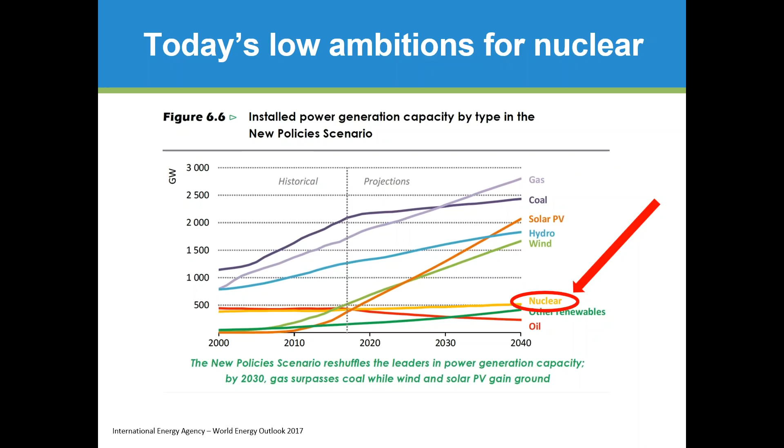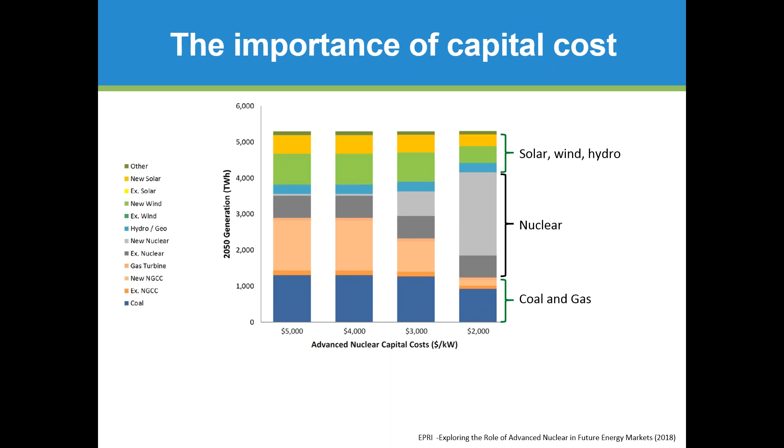The reason underpinning this is fairly obvious. This is a chart from another study, from EPRI, the Electric Power Research Institute in the USA. It's a 2018 report, and they did a very nice piece of work using quite sophisticated modeling tools to look at what impact the capital cost of nuclear had on its projected market share, in this case market share by 2050. This is US market specific, but it's a pretty good indicator for the global position as well. What it's saying is that at $5,000 per kilowatt, the bar on the left, nuclear basically has no role to play. At 4,000, it still has no role to play. At 3,000, it starts to become an economically viable option. And at 2,000, it becomes the dominant power source, even in a country with very cheap fracked natural gas.

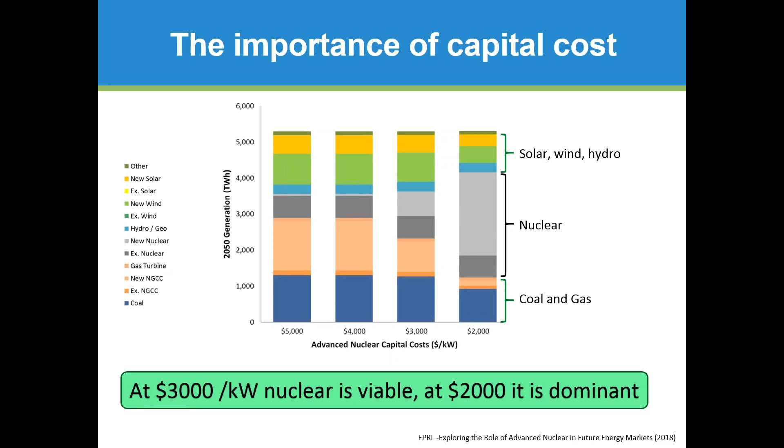It's literally all about capital cost with nuclear. And of course, where we are today is on the wrong side of that $5,000 figure, which is why nuclear is essentially going nowhere.

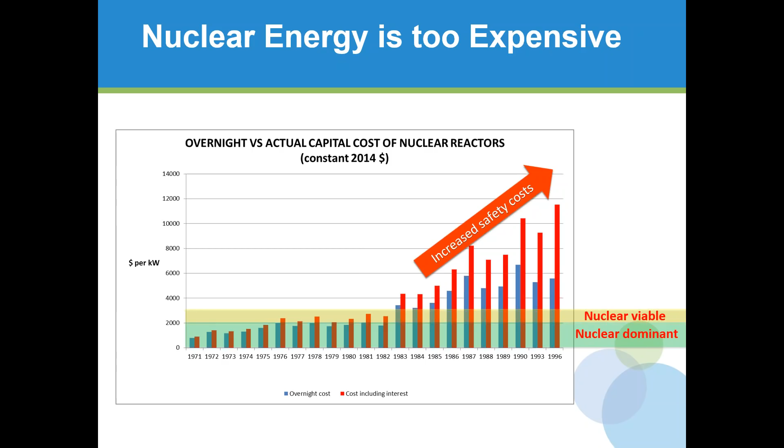What happened in 1980? You probably all know the dates. We're talking Three Mile Island and Chernobyl. After that point, a technology which prior to that point was actually cheap enough to become a really important economic force in power generation ceased being so. Prior to 1980, countries could go, like France, almost entirely nuclear and do so at great profit. Since 1980, that has no longer been the case. So the solution is pretty obvious: fix that problem of increased safety costs, but nobody is going to simply take away the safety systems. That would not be a good move.

I find it quite helpful to look at a really standard graph from the Health and Safety Executive. You have equivalents from most safety organizations around the world. It's called a hierarchy of controls, which are used to reduce risk.

It goes from the top, which is blue, the most effective controls you can apply to risk, and ends at the bottom with the least effective: start eliminating, then substituting, then bringing engineering controls, then administrative controls and personal protective equipment.

So what happened after Chernobyl, Three Mile Island and Fukushima? Essentially, we put a great many engineering, administrative, and to a degree personal protective equipment controls in place. In the context of nuclear major risks, PPE are iodine tablets, and right now they're suggesting distributing those to the entire population of Belgium. That's going to do nuclear a great deal of good, obviously.

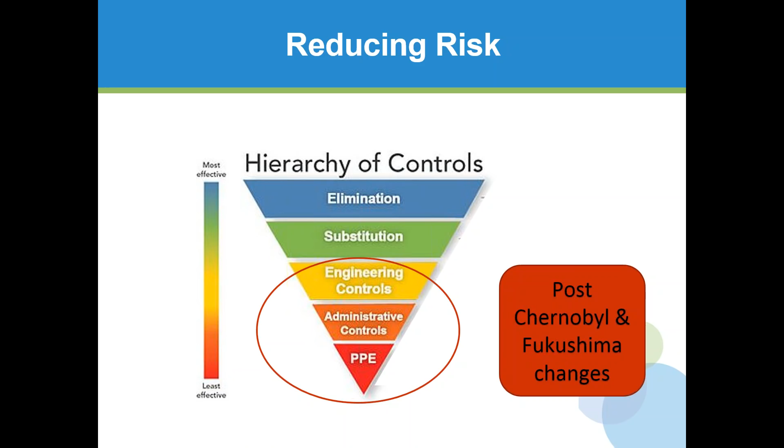We have administrative controls of extraordinary depth and power, and we spend a huge amount of money on engineering controls with containment domes, ultra-reliable systems and so on. What we haven't really done is the things at the top of that pyramid, which are elimination and substitution of hazards. And that is the Moltex approach to this.

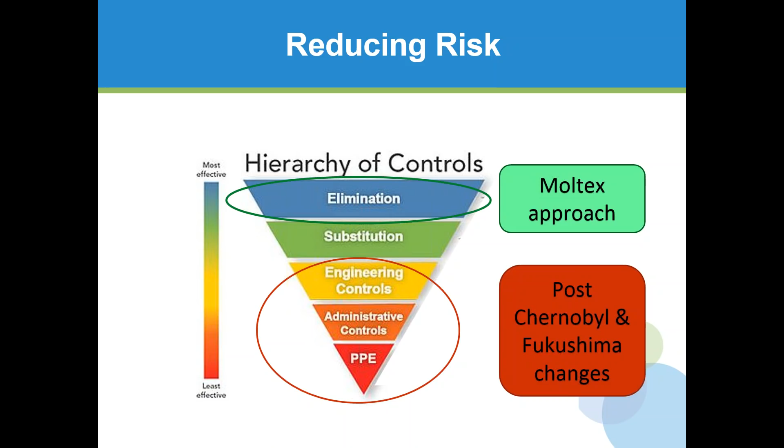It is to focus on reducing risk by eliminating hazards. And there's a very good story that can be told. So let's talk about hazards.

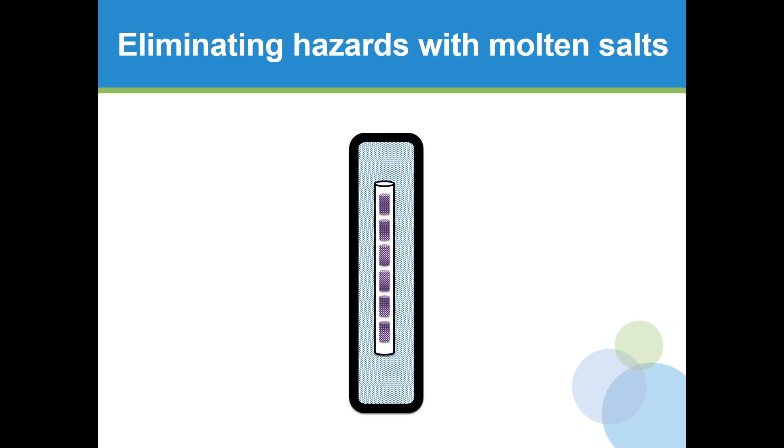This is my diagram of a pressurized water reactor. I have a big black heavy metal pressure dome, pressure containment. Inside that you have water. Inside that you have a fuel tube, or rather a few fuel tubes, containing uranium oxide pellets. So where are the hazards?

Well, they start actually with the fuel. Fission, as you all know, produces gaseous fission products, and a lot of them — a typical fuel pellet by the end of its life will have produced about 50 times its own volume of gas. Mostly noble gases, but also cesium and iodine, which in the chemistry of fuel pellets are also gaseous.

Those gases are trapped in the pellets. The amount of space for them is quite limited because uranium oxide fuel pellets are very dense, around about 5% available space. So you're squeezing 50 volumes of gas into 5% available space. You are talking about hundreds, approaching 1,000 bar pressure of those contained gases. That's huge. It's a tribute to how well we make uranium oxide fuel pellets that they actually hold those pressures in.

Second risk, of course, is that we've surrounded these fuel tubes with water at over 300 degrees centigrade. Well, you don't have to be a genius to know what happens if that pressure boundary fails. Boiler explosions have been some of the worst industrial explosions in history, and fundamentally, Chernobyl was a steam explosion. So you've got at the heart of your technology two really major hazards: volatile, highly pressurized, radioactive fission products, surrounded by a very powerful driving force to aid their dispersal.

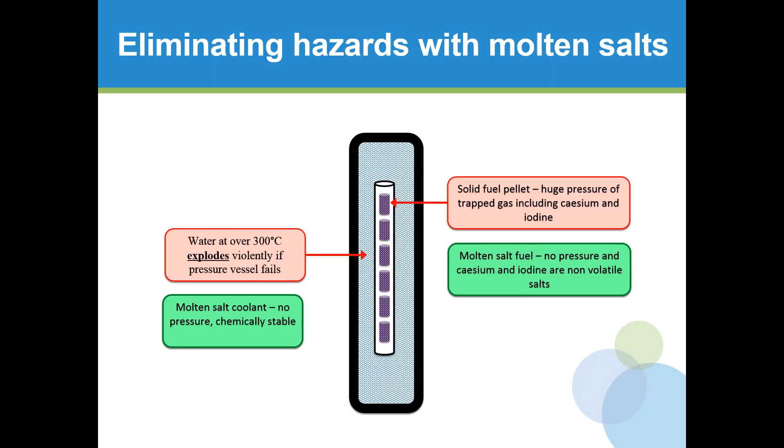Okay, enough economics for the moment. Let me talk about reactor design. I'm going to do this quite quickly because this is only a 30-minute webinar.

First of all, I need to explain that there are two completely different forms of molten salt reactor out there in the world. The Stable Salt Reactor, which is the Moltex technology, has separate molten salts for the fuel and the coolant.

All of the MSRs are based on what was developed in the 1960s in the USA, which is a system where the fuel and the coolant are the same thing. When you have fuel and coolant the same, you pump the fuel into a reaction chamber where it goes critical, gets hot. You then pump it through a heat exchanger where the heat is taken away to do something useful. And then you return it through chemical purification systems, pass valves, drain tanks, all sorts of complications. But essentially, it works by pumping the fuel salt in such a way that it flows in turbulent form, which gives you efficient heat transfer. The Moltex approach, the Stable Salt Reactor, does not do that.

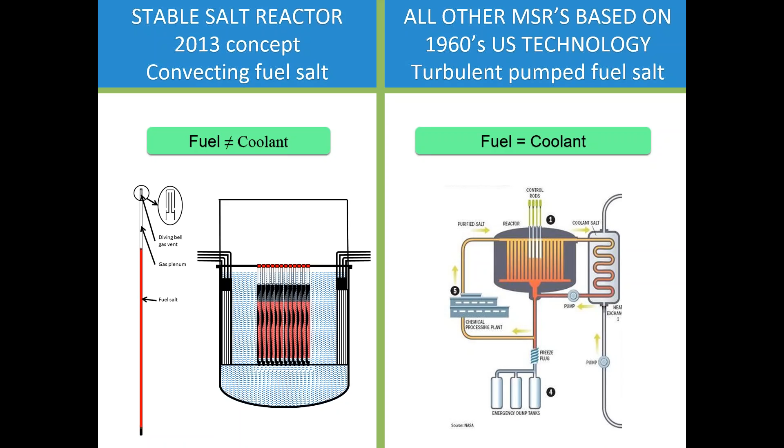It puts molten salt into fuel tubes, grouped into fuel assemblies, really very, very like normal solid-fueled reactors. That brings some really major advantages.

I've just listed here some of the challenges associated with pumped molten salts. You're pumping something which is radioactive in the sense that we have never really experienced before. This isn't the glowing blue spent fuel coming out of a PWR. This is actually the fuel in the core. This is emitting gamma radiation at several kilowatts per litre. It is radioactive in a way that is almost hard to comprehend, and we're pumping it around a circuit, which someday is going to spring a leak.

The engineering challenges are obvious. Quickly, the other ones: because of the necessary chemistry to pump molten salts, you require new alloys, requiring new in-reactor validation to make them usable in a modern nuclear system. People talk about Hastelloy-N as being something which has experience. Well, Hastelloy-N hasn't been used in nuclear since the 60s, and the data produced then for its behavior would not be accepted by modern regulators. So you are looking at a new alloy.

The third is incompatibility with the IAEA safeguards protocols. The agency's safeguards protocols essentially work by tracking fissile material in defined fuel assemblies. Pump systems don't have defined fuel assemblies. They have bulk fissile material where you have to know the composition and the volume precisely at all times. It can be done, but right now the protocols don't exist, and it will probably take over a decade to put them in place. Last one there, just skip over the off gas.

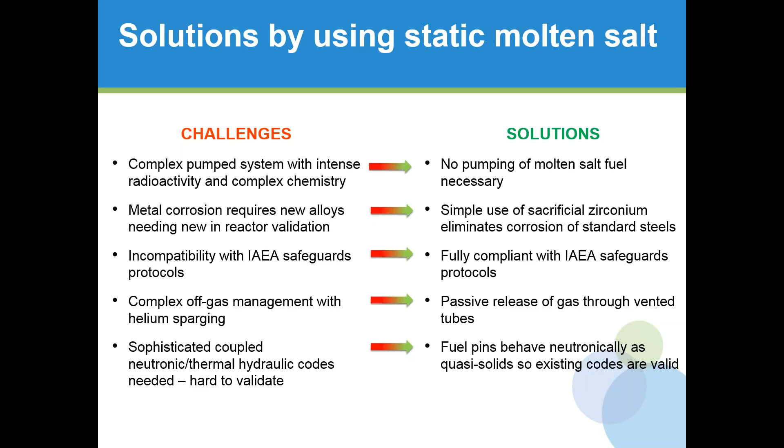So if it's such a good idea to use static salts, why haven't people done it? Why is this a new concept? Because it's actually pretty obvious. And the answer comes back to a mistake. Only way to put it, really.

The first molten salt reactor was developed for the US Air Force. They wanted a reactor to power an aeroplane, and they quite rightly rejected the concept of putting molten salt into fuel pins. They did consider it, and they modeled it. They rejected it because in an aircraft you can't rely on gravity. And if you can't rely on gravity, you can't rely on convection. And in liquids, the dominant heat transfer mechanism is by convection. And so they rejected the idea of unpumped molten salts for really very good reasons. In an aircraft, they were a disastrous idea.

But then nobody went back and revisited that decision when we decided not to fly nuclear reactors around the world in aeroplanes. And we should have done. That is essentially where Moltex started. We revisited that decision and showed that actually static molten salts work just fine, provided you can rely on convection.

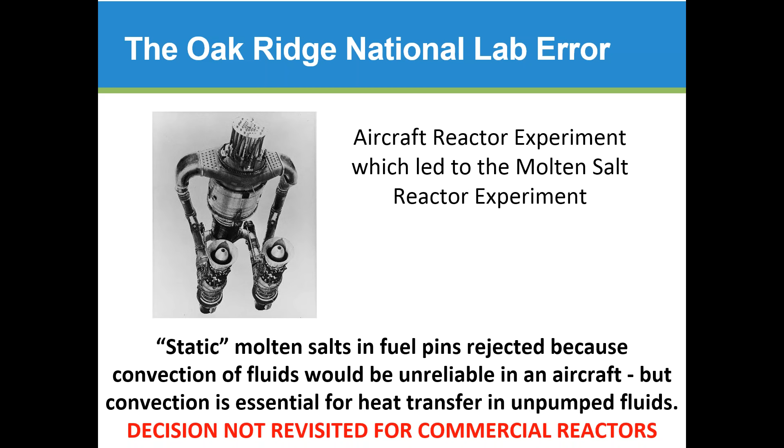So what's the reactor which results from that? This is the very oversimplified cartoon version, but it's useful just to give you an orientation of where we are.

So we have a tank with an argon gas containment above it. In the tank we have a pool of primary coolant, which is a zirconium fluoride-based molten salt. Immersed in that pool we have the fuel assemblies forming the reactor core. The fuel is a mixture of sodium chloride, plutonium and uranium trichloride that I will talk more about later. Also in the pool are the primary heat exchangers and pumps, which circulate the coolant through the core.

This is an integral design. It allows all of the radioactive coolant to be held within the pool rather than pumping it outside of that containment and then having to worry about leaks.

For those familiar with nuclear reactor design, this will look quite similar to a sodium fast reactor, and it is, apart from the absence of sodium and the use of molten salt fuel, except for one quite important difference, which is that the apparatus to move the fuel assemblies, the fuel assembly support and movement mechanisms, are above the level of the coolant salt. Now this is actually hugely helpful because you are not having to do mechanical things inside the molten salt, which simplifies the engineering quite a lot and also means you can see what you're doing.

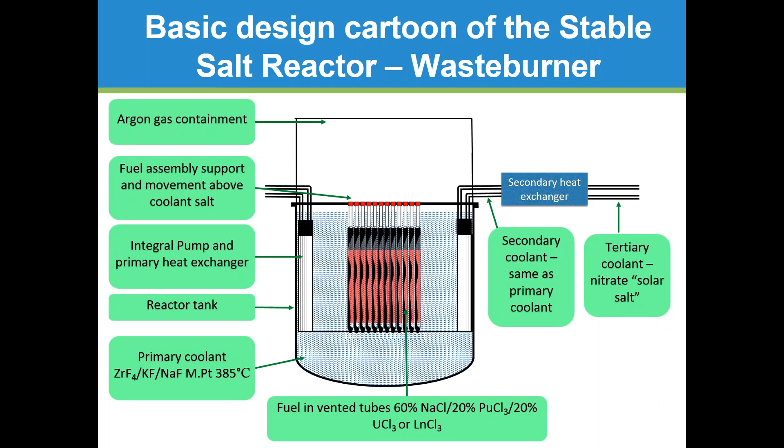Okay, so just going through the reactor step by step. We start with the fuel tube. The fuel tube is made of the same steels we make sodium fast reactor fuel assemblies from, probably HT9 in our case. It has a gas plenum to collect the fission gases and hold them up long enough for the particular xenon-137 to decay to cesium-137 so it doesn't escape the tube in that way. At the top of the tube there is a gas vent, which is a non-return valve, so that the excess gases can bubble into the coolant.

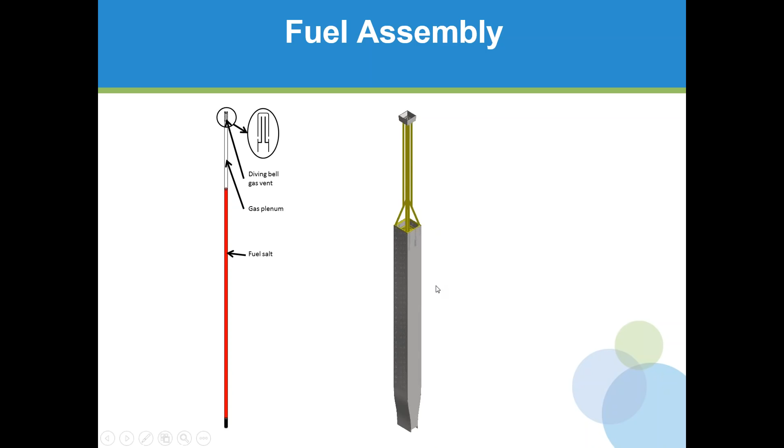Those fuel tubes are put together into a fuel assembly with a wrapper made again of the same materials used in sodium fast reactors.

Those fuel assemblies are put together into the basic reactor module. This is a modular reactor, but not modular in the context of conventional small modular reactors. I'll come back to that. This is a factory-produced 150 megawatt electric module. It basically contains all of the engineering equipment for the reactor in the module. It contains heat exchangers, the pumps, the apparatus for moving the fuel assemblies themselves, and quite a few other things. All the instrumentation, contains the control blades, all of that in the assembly.

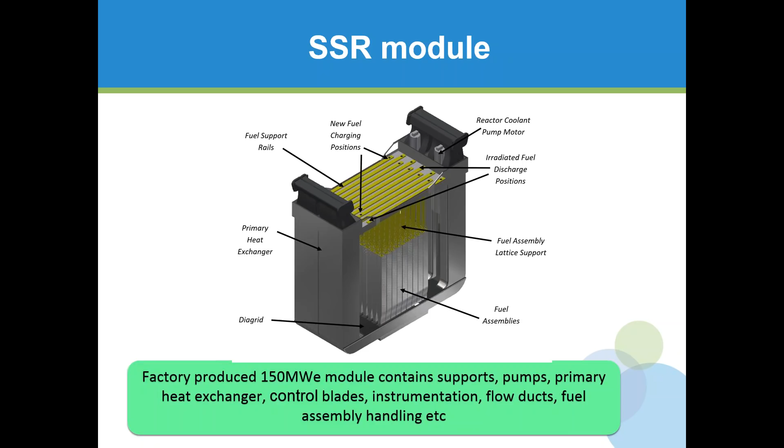That assembly sits in a tank along with other assemblies. In this case, this is our smallest version of the reactor. It has one full assembly in the middle and two half assemblies at the outside. Between the modules, rather not the assemblies, between the modules are control blades which are used only to shut the reactor down. They are not control mechanisms in the sense of adjusting reactivity. They're either in or they're out. If they're in, the reactor is shut down. If they're out, the reactor is live.

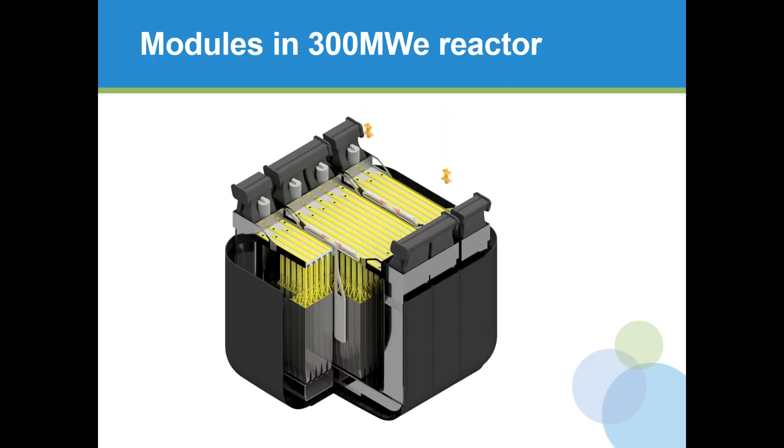There is a problem with what I would call conventional small modular reactors, where if you want a decent sized power station, you need to put half a dozen reactors onto the same site. You gain the advantage of modular factory construction with such reactors, but you lose the economy of scale, and economies of scale are very real. With the design of the Stable Salt Reactor, we achieve the benefits of modular factory construction, building basically the entire nuclear engineering part of the reactor in the factory, but we maintain the economy of scale of having a single reactor, single control room, single fuel managing system. Economically, that's actually quite important.

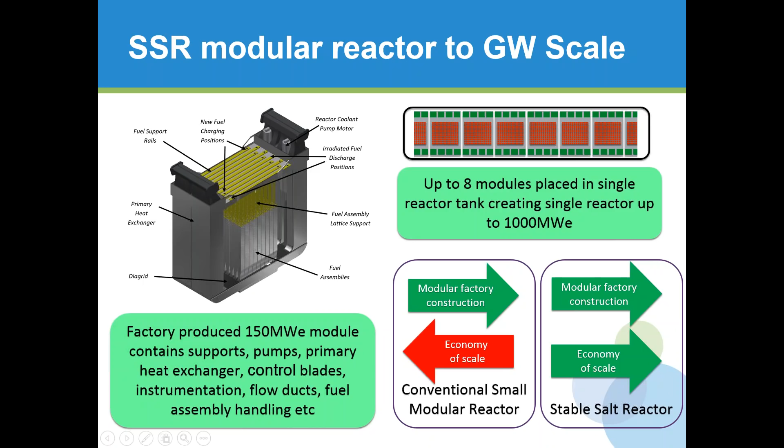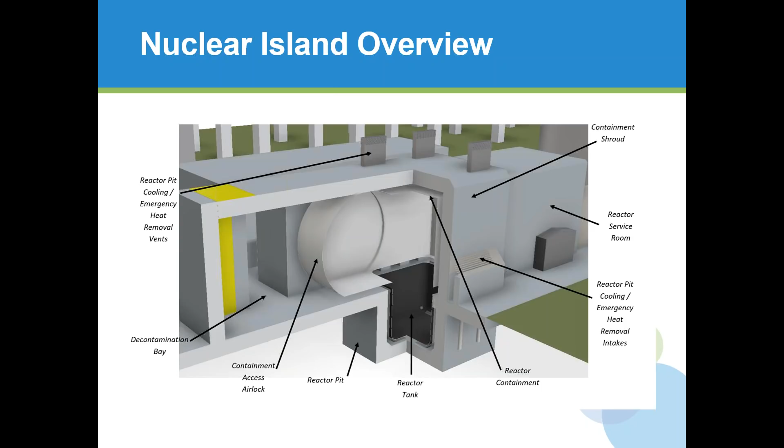I have a best part of an hour talk on the design of this, which I don't have time to give here, so I'm just going to go very quickly through some of the key design decisions and why we made these. There's a lot more information on this available on our website for those interested.

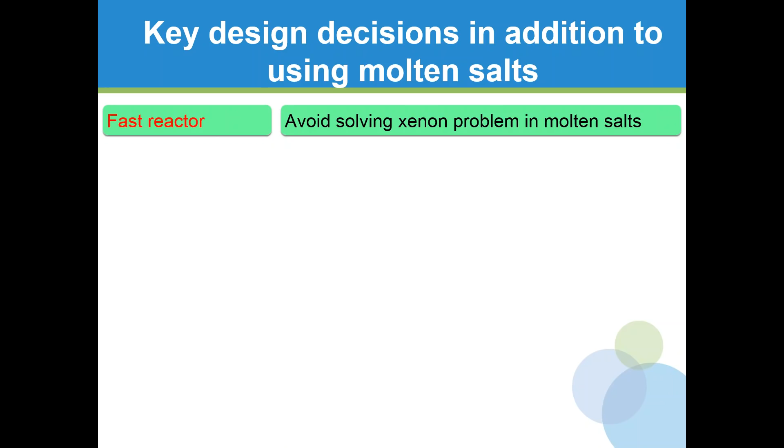The first decision was making a fast reactor rather than a thermal spectrum reactor. The reason is that xenon in molten salt reactors is actually a real problem. Xenon and the xenon pit effect is very well known in nuclear and very well understood, rather the hard way, sadly. In molten salts, the xenon is going to bubble out, but you have to worry about how quickly it will bubble out, what the residual concentration will be, what are the kinetics of the xenon removal, how is the xenon going to move around with the salt. All of these are actually safety critical understandings, and frankly, nobody does understand them properly yet. The molten salt reactor experiment, operating back in the 60s, actually suffered unexplained power transients of about 20%, which were ascribed to problems with the xenon effect, but never actually properly described. That has to be done.

Second, the chloride fuel. We use a chloride fuel rather than a fluoride fuel. Most of our competitors use fluoride, but using chloride allows us to use standard steels, standard neutron tolerant steels like HT9. It allows that because we can stabilize chloride fuel with zirconium metal. You cannot stabilize fluoride fuel in that way. So this allows us to use existing, well understood materials.

The coolant is zirconium fluoride based, there are other options, but we like zirconium fluoride for two reasons. One is that it has a lower valence salt, zirconium difluoride, which gives the system a very strong and stable reducing potential, again allowing the use of standard steels rather than special high nickel alloys. The second thing is that zirconium, as it comes out of the ground, is always contaminated with hafnium, which might seem like a problem. But actually, by having the natural level of hafnium in our zirconium fluoride coolant, it converts the coolant into a really very effective neutron screen. So it protects the tank and the heat exchangers from the neutron flux from the core without having to worry about any expensive and potentially replaceable screening.

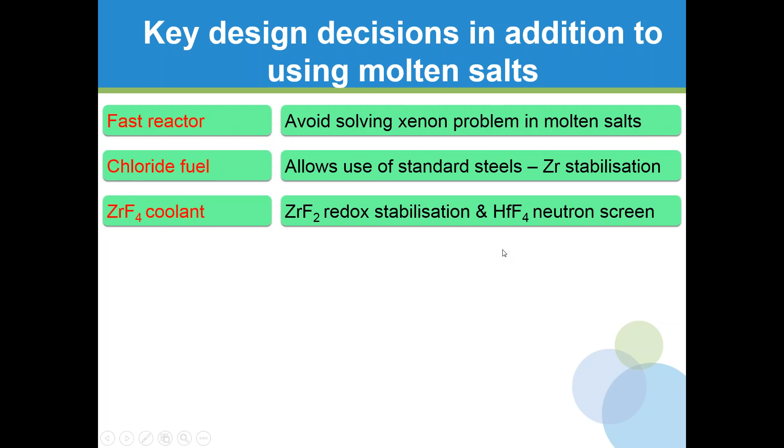Tubes: we vented the tubes. This eliminates the pressure stress which would otherwise build up in the tubes. Tubes in sodium fast reactors are sealed and the gases build up to high pressures, which ultimately limits the amount of burnup you can achieve. We can vent tubes because the reducing state of the salt we have in there, in particular the zirconium stabilization, essentially eliminates the dangerous radioisotopes from the vented gas. There is detail about that on our website.

On-power refueling sounds like a great idea. It keeps your reactor operating all the time. That's not why we did it. By doing on-power refueling, you eliminate the hazard which happens when you've freshly fueled a reactor. You have far more fissile material in it than you need to achieve criticality, so you have a large amount of excess reactivity. Excess reactivity is a hazard, quite a serious one in fact.

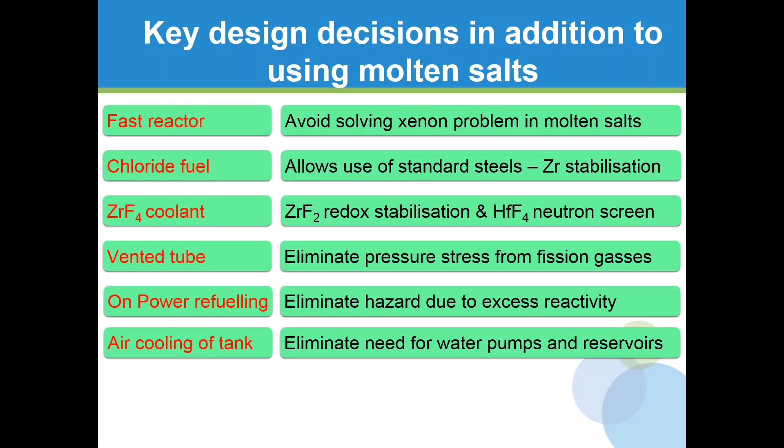The tank is air-cooled. This eliminates the need for water pumps and reservoirs. This is not unique to Moltex. Most of the smaller advanced reactors in the world are using passive air cooling. It's just a better idea.

Underpinning all those design decisions is our safety philosophy: to eliminate rather than control hazards. I mentioned the two big ones early on in the talk: eliminating highly radioactive elements from the vapor source term, and eliminating the high pressures associated with both fuel and coolant. But it goes on.

By using chemistry to eliminate the thermodynamic drivers of corrosion, we eliminate the problem of corrosion. We will have to monitor corrosion, obviously, but it'll be confirming it's not there. We are not managing corrosion. We're not replacing things because they corroded. We're not making sure that things haven't corroded too far before we replace them.

We've eliminated the problem of chemical reactivity within the nuclear island. We have no two chemicals within the nuclear island which will react violently with each other. That may seem really obvious, but putting zirconium and water together is a hazard. Putting sodium and water together is an almost insane hazard.

We've avoided those. I mentioned excess reactivity and the advantage of continuous refueling. That removes what I call control rod hazard. Control rods are wonderful things, but we have blown up a number of nuclear reactors by misuse of control rods. If you have a system that requires control rods, you have a really very serious hazard. We've eliminated it. And emergency heat removal, removing the need for active intervention there is, again, obvious and done by many people.

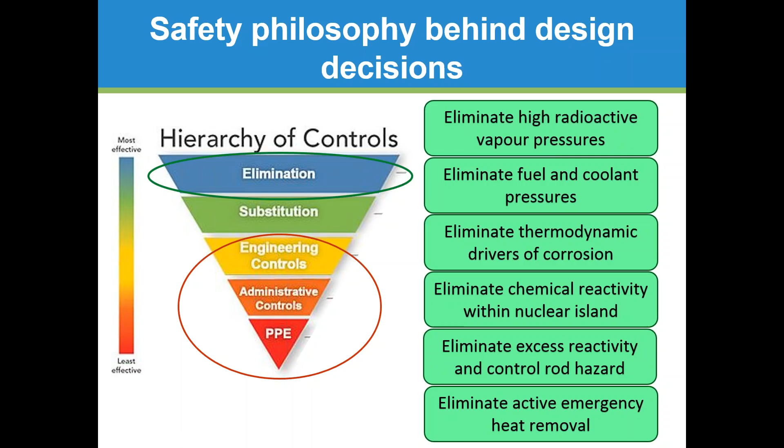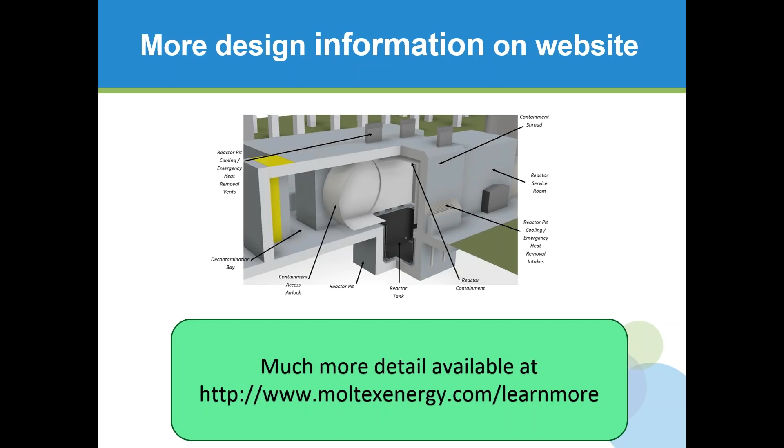Okay, I've really skipped over the design. There isn't time to go into a lot of detail. If you're interested, there is a document in the Learn More section of our website which will give you a lot more detail on that.

Okay, I want to quickly talk about the fuel that we use. It is a plutonium-based fuel. We're using plutonium and higher actinides as our fissile material. There's a key difference from MOX fuel here, which is actually very important. To make MOX fuel, you need very high purity plutonium. That's because you have to make a uranium oxide, plutonium oxide pellet with extremely precisely defined physical properties.

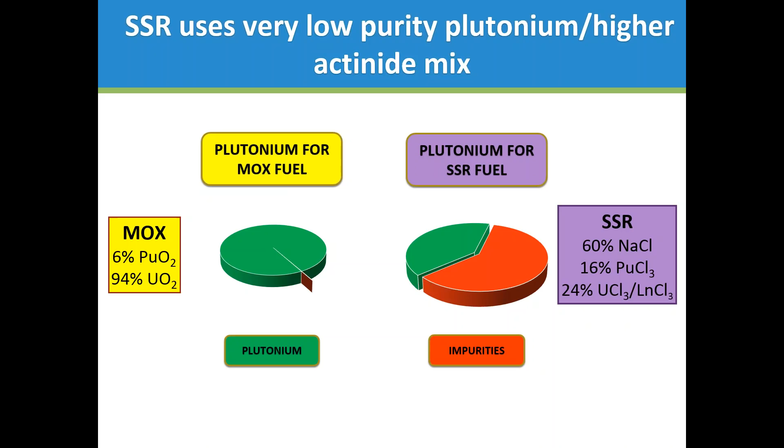We're making a molten salt. That means that our plutonium can actually be contaminated with more than its own mass of uranium left over from the reprocessing, and lanthanides. Lanthanides are very important because they are the hardest thing to separate from plutonium. So we are able to use very low purity. What does that mean? It means it's much, much easier to reprocess spent oxide fuel into our fuel than it is into MOX fuel, which is just as well, because nobody's ever really made MOX an economically viable option, as you'll mostly know.

The declad pellets go into an electroreducer. There's plenty in literature about this, I don't need to talk in detail, which reduces the oxide to a molten uranium iron alloy, melting at about 725 degrees centigrade. That has a waste product, which is the electrolyte from the electroreducer. That electrolyte concentrates the major heat-producing fission products into about 1/100th of its original volume, which makes it a useful end-output in fact, because that allows you to produce radioisotope-generated heat batteries, which in some parts of the world have a very real market.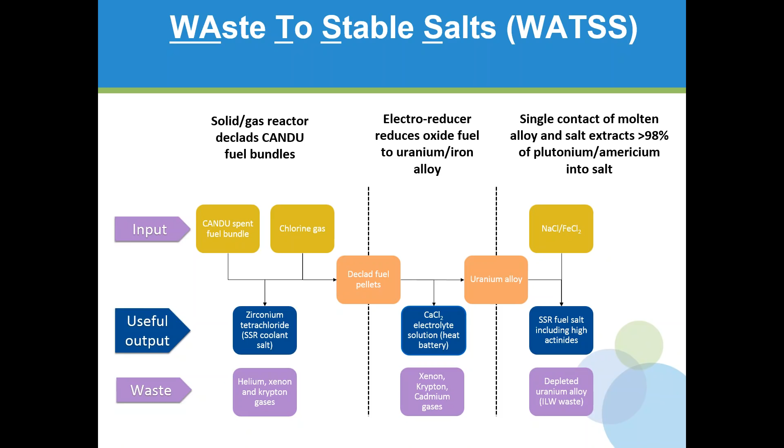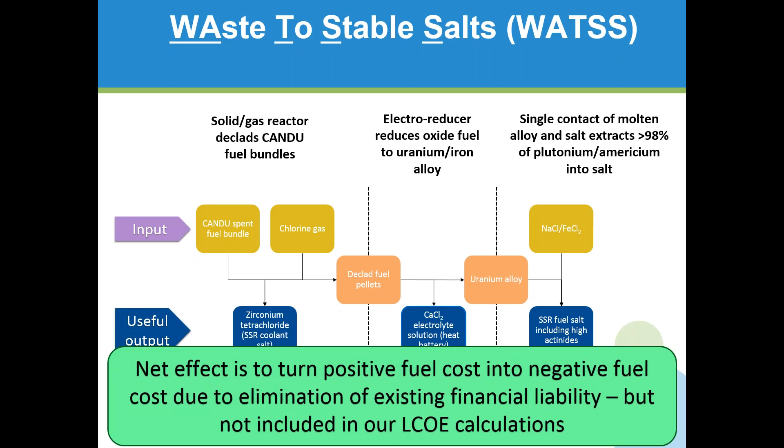And that is the process producing our fuel. It's very simple, very cheap, and really very importantly, profitable. The net effect is to turn what for most nuclear reactors is a positive fuel cost, typically around £5 per megawatt hour, into a negative fuel cost. We actually make money by making our fuel. But we haven't taken advantage of that particular fact in our levelized cost of electricity calculations. We don't need to, we're already highly profitable.

Third technology underpinning Moltex, we call it GridReserve. Grid scale energy storage is a bit of a holy grail on nuclear power grids at the moment. They're needed for renewables because renewables tend to produce power when you don't actually need it. But it's expensive.

This is an advantage of the fact that the Stable Salt Reactor has a high output temperature. If you're a PWR with an output temperature of about 300 degrees, you really can't practically store that energy. At 600 degrees, which is our output temperature, it becomes possible to store that energy in a thermal store. This is not new technology, it's used in the concentrated solar power industry. Its cost is about one third of the cheapest battery storage technology currently envisioned, much cheaper than what's currently on the market.

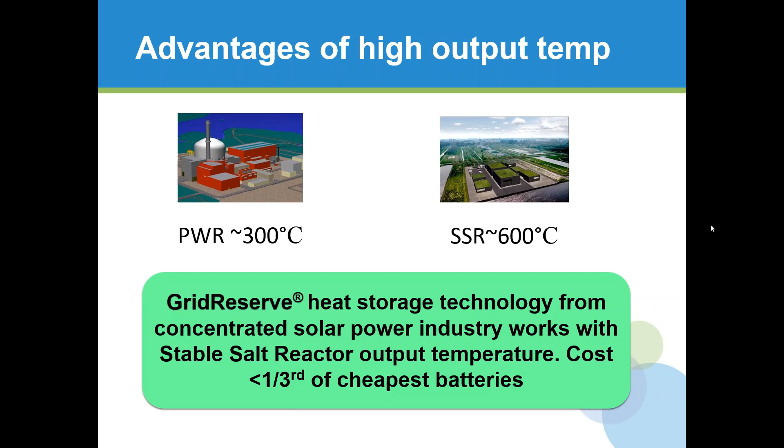It's a very simple system. You simply take the output heat from the reactor, store it in molten salts, actually a nitrate salt, in big storage vessels, and then use it when you want the electricity. So a very, very simple concept.

What I've shown here on this slide is our preferred deployment model for the Stable Salt Reactor. This has the reactor itself, with a 1 gigawatt electric power output, coupled to a primary heat store, which is where the heat initially goes. That is a nuclear safety functioning part of the system. So when the reactor is shut down, that primary heat store is also used to manage the decay heat over the first several hours when it's being produced at a high level, and therefore it is a nuclear safety critical component.

However, the salt is then transferred from that to the secondary heat store, which is much, much bigger, and from the heat store is used to go to steam generators and turbines.

Two things from this slide to take. The first is that the secondary heat store and the boilers and turbines have no function in nuclear safety whatsoever. They actually function essentially in the same way that demand on the electricity grid operates for a conventional nuclear power station. As such, depending on the country, it can be outside the nuclear site boundary, or in other countries where you don't license activities, outside the nuclear regulated activity region.

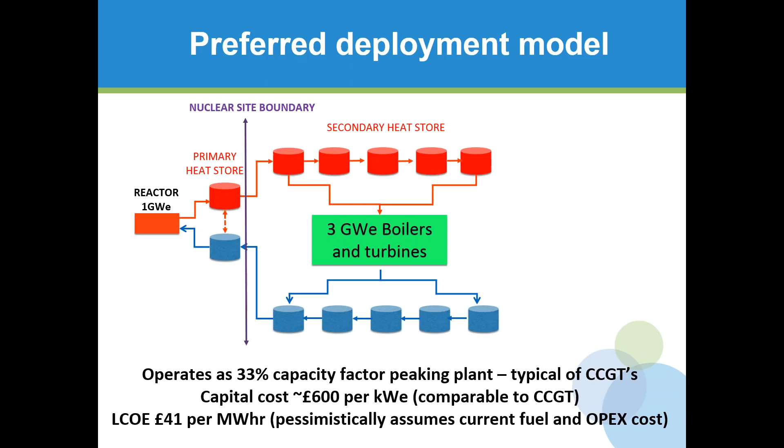The economic consequences of that system are actually huge. This is UK data. It shows the average over a year of the premium paid for electricity by the grid over the course of a typical day. This is actually 2016 data, averaged over the whole of that year.

Early in the morning, during the dark hours of the night, electricity has low value, its value is 25% below the average. Then you have a morning peak, as people turn their kettles on and get ready for work. You have an afternoon lull when people are at work. Then an evening peak when people come home and turn their TVs and kettles on. So we would charge our GridReserve during the night, partially discharge it in the morning, charge it some more during the slack time of the day, discharge completely during the evening hours, and then charge up again.

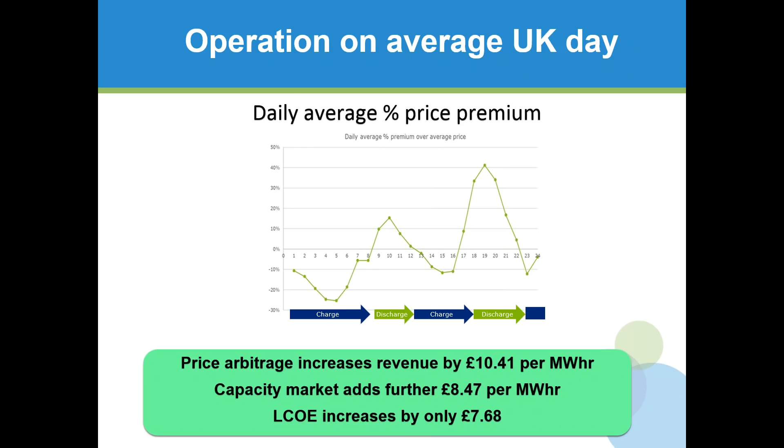That price arbitrage, selling it when it's valuable, not when it's got low value, increases the revenue by over £10 per megawatt hour. In the UK, entry into the capacity market mechanism adds a further over £8 per megawatt hour to the revenue. And the increased cost of having the ability to do that is £7.68 per megawatt hour. So this is an enormously profitable addition to the reactor.

First, there are technical reasons why this reactor will be considerably cheaper. Eliminating instead of controlling hazards really is much cheaper. Not having high pressure systems in the nuclear island. High pressure systems are expensive. Very, very thick walled, very, very high integrity. They're expensive to make. We don't have any.

The second surprisingly important aspect is the effect of high temperature. I mentioned that high temperature allows you to use GridReserve. It also allows you to use standard steam turbines of the type that are produced in their dozens or hundreds around the world for combined cycle gas turbine systems. Those turbines cost about one sixth of the cost of corresponding power pressurized water reactor turbines. That's for two reasons. A PWR turbine operates on very poor quality steam, low temperature, low pressure, and is therefore considerably bigger. The second is there's no demand for them. Each one is bespoke and therefore you lack the economies of production in scale.

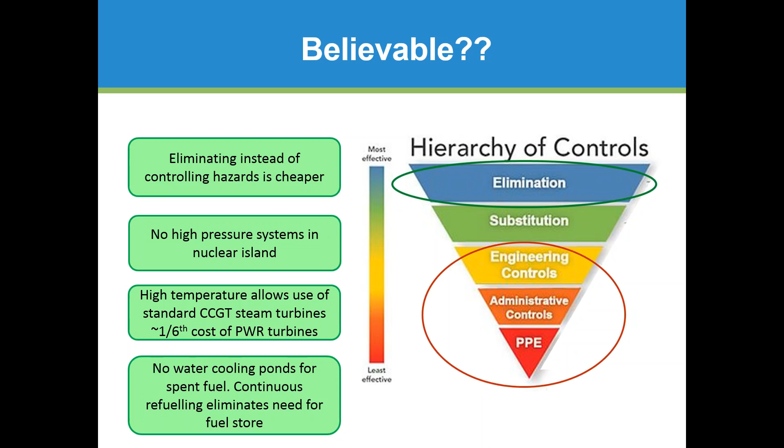And then there are other factors, like we don't need cooling ponds for our spent fuel, we don't need a fuel store because it continues to refuel. All of these save money. I have to say I haven't convinced anybody with those arguments of our cost being low.

This is slightly more credible. So we had our nuclear cost estimate done independently of ourselves by Atkins, according to their standards. We didn't tell them how to do it, they told us how they would do it. This cost estimate made no allowance for benefit from modular build. It was based entirely on the assumption of building it on site in the UK, which is the most expensive place in the world to build a nuclear reactor.

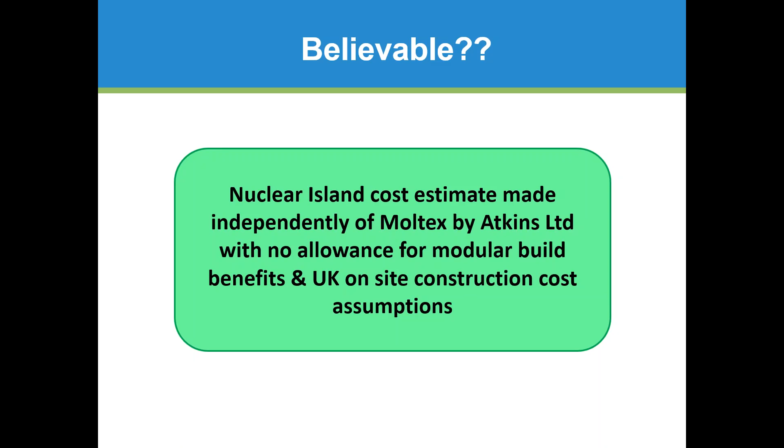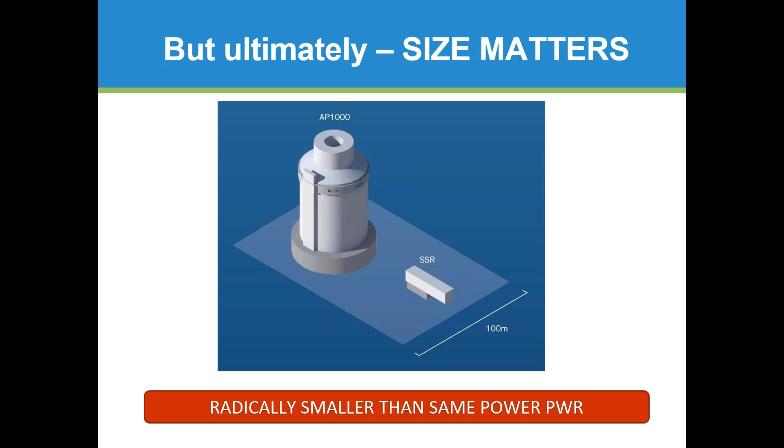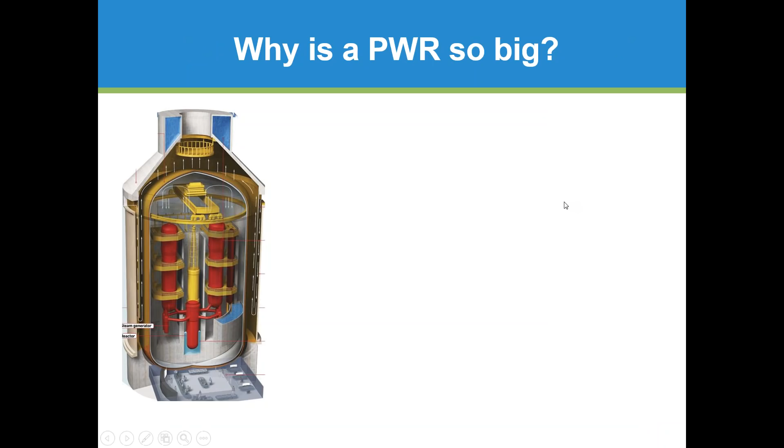How is that even possible? How is that even possible? Well, the key comes to understanding why the pressurized water reactor is so big. This is a cut through of the AP1000. Down there in the middle is the nuclear reactor core. It's really quite tiny.

The containment vessel has to be big for a number of reasons. First of all, it actually needs a lot of empty space to dissipate the steam explosion that it might have to survive. So you have a meter thick concrete wall, but if you don't have space for the steam explosion to dissipate before the shockwave hits that wall, it will breach it. Secondly, inside the dome you have some very, very big components. You have pressurizers, you've got very large high pressure pumps, but the biggest of all is you have your steam generators, which are huge, and occupy a very large fraction of the volume inside there.

The SSR doesn't need the empty space to dissipate the steam explosion. There is no steam in there. There's no pressure, it doesn't have pressurization, and the pumps are actually in the tens of kilowatt range. And most important, the steam generators are not in the reactor, they're not even on the nuclear site. They are outside the nuclear licensed area, off with the grid reserve. That's the technical driver for why the size is so small.

Both of those, the AP1000 and SSR, they both have one meter thick containment walls. We are not skimping on containment. We may not need to contain the explosion, but we do need to keep out low-flying aircraft, so we have to survive the same stresses. But we do it on a much smaller scale.

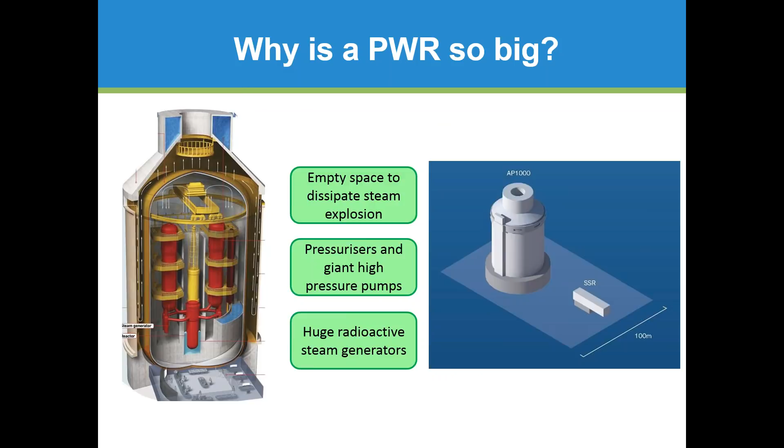Skip over this one because I've actually talked through this already.

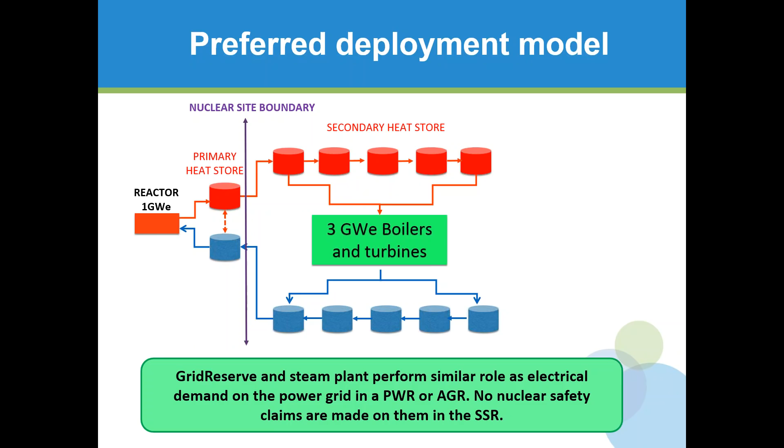The key reason why we can argue for the entire secondary heat store, boiler, and turbine system being outside the nuclear regulated area is because in the safety case, now well advanced for the SSR, we make absolutely no claim on function of that material outside the site boundary, none. It has no role in any safety function at all. And that, of course, is the definition of when it should not be nuclear regulated.

What's the impact of this on cost? Well, the overnight capital cost for the reactor is low, but it also has a lot of uncertainty. Nobody's built one yet, and nuclear has something of a reputation for overrunning cost estimates, to put it mildly.

Because of this separation of the boiler turbine heat store system from the nuclear site, we can actually break these capital costs down. All of this material outside the nuclear site is absolutely industry standard material - it's like a combined cycle gas turbine without the gas turbine. As a result, the cost estimates for that are very high confidence.

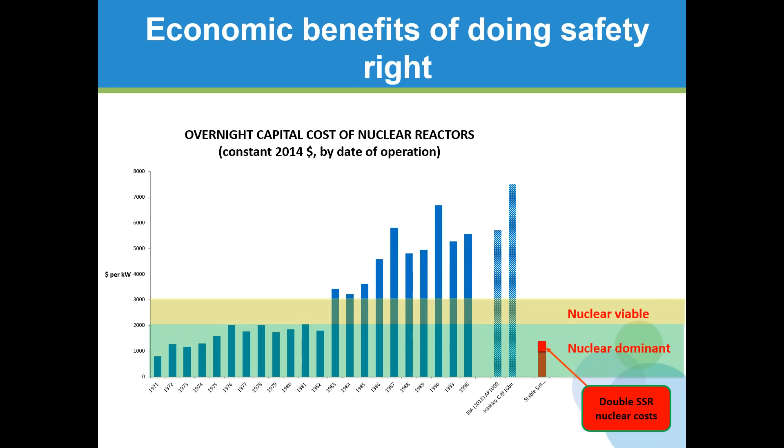That is absolutely what we are setting up to do. We see a world with two major sources of energy: renewables, which operate at zero marginal cost, with stable salt reactors providing the dispatchable energy needed to complement the renewables. That is the vision of our company.